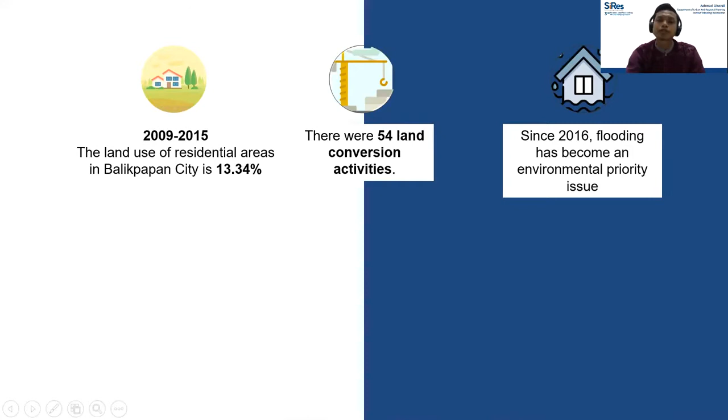First, introduction. In the period 2009 until 2015, the land use of residential area in Balikpapan city is about 13%. There were 54 land conversion activities, and since 2016, flooding has become an environmental priority issue in Balikpapan. The Klandasan Kecil watershed is one of the fastest growing areas in Balikpapan city. So this is the main issue.

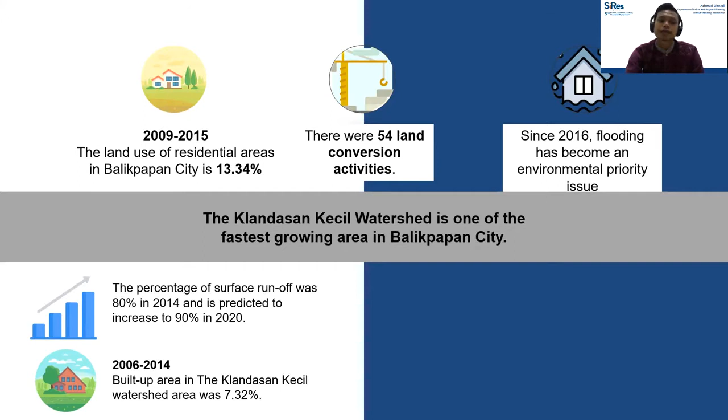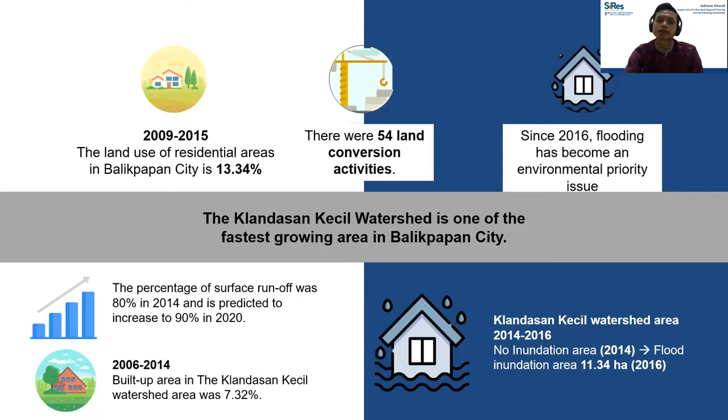So the rainwater runoff that occurs in high density built-up area is the issue, and recent research on water management in urban areas has found a new concept to heal this condition called water sensitive city. So, as a first step to implement the concept, it is necessary to calculate the potential runoff in the Klandasan Kecil watershed, Balikpapan.

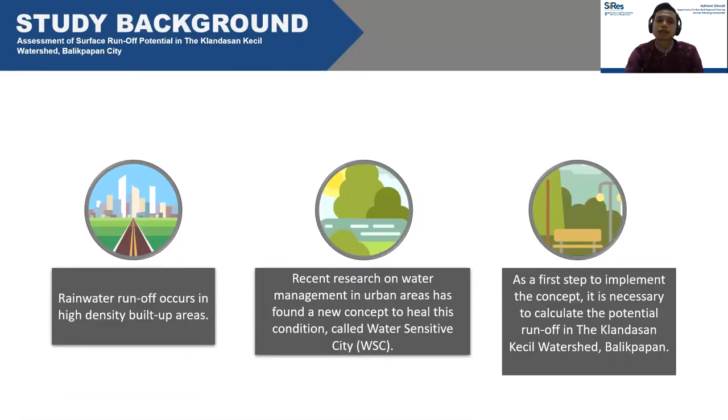I begin with a literature study on the variables in the runoff assessment in the Klandasan Kecil watershed area to determine the surface runoff, the volume of surface runoff and hydrological discharge. We found that this variable is the main variable to calculate the volume of surface runoff to calculate the potential flood discharge.

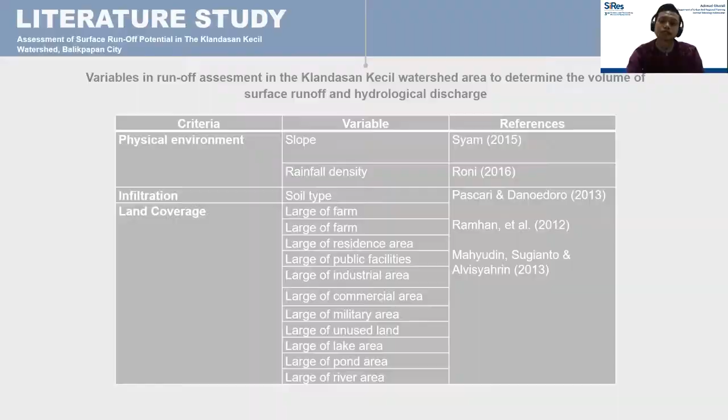And then the research methodology. First, data and scope of the study. The region used in the research area was the Klandasan Kecil watershed region, which is a rainwater catchment area. Primary data collection was obtained by means of a field survey regarding the condition and dimension of the drainage channel using a water pass device.

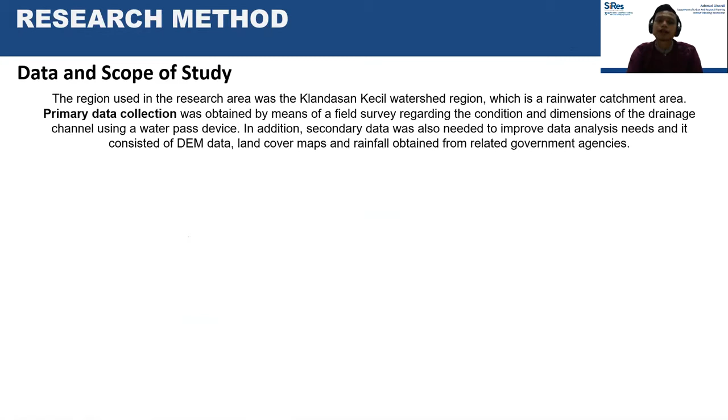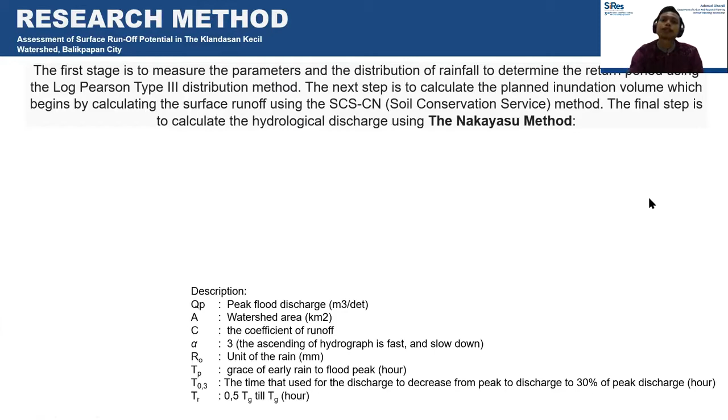And then the first stage, to measure the parameter and distribution of rainfall, determine the return period using the log Pearson type 3 distribution method. The next step is to calculate the planned inundation volume, which begins by calculating the surface runoff using the SCS-CN or soil conservation service method. And then the final step is to calculate the hydrological discharge using the Nakayasu method. Here, the formula to calculate it.

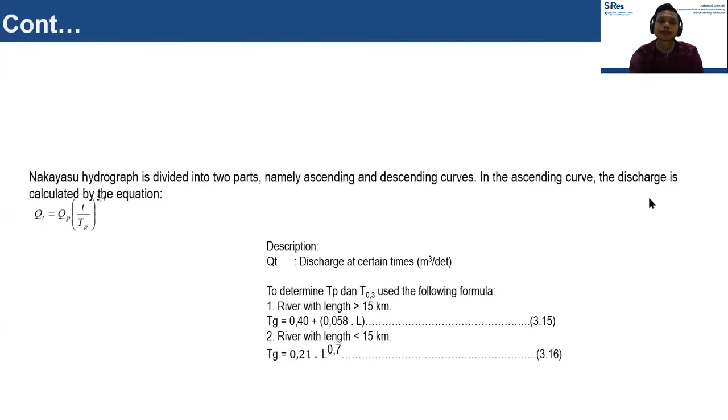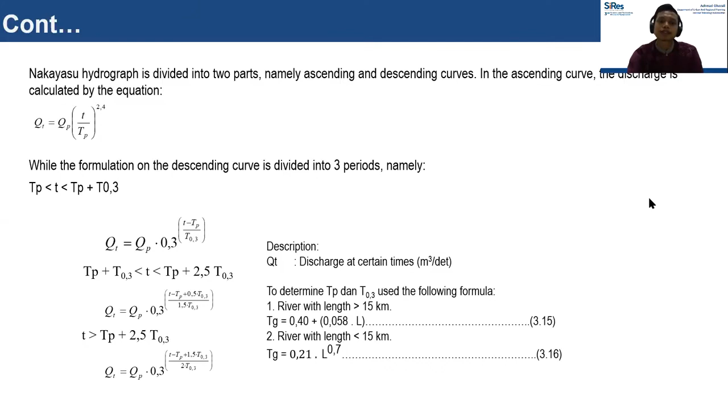And then the Nakayasu hydrograph is divided into two parts, namely the ascending and descending curve. In the ascending curve, the discharge is calculated by this equation, while the formulation on the descending curve is divided into three periods, namely the first period, second period, and the last period.

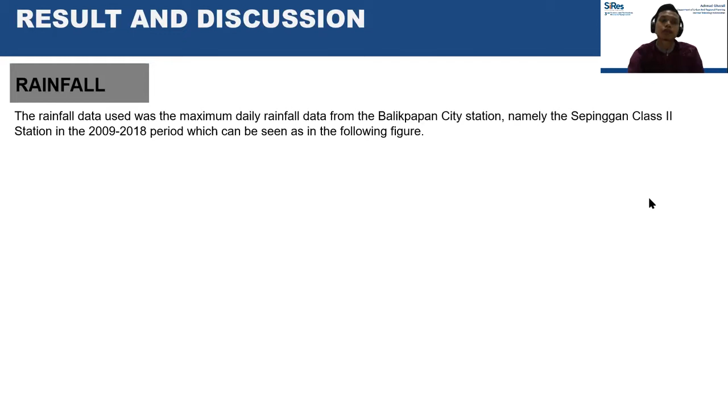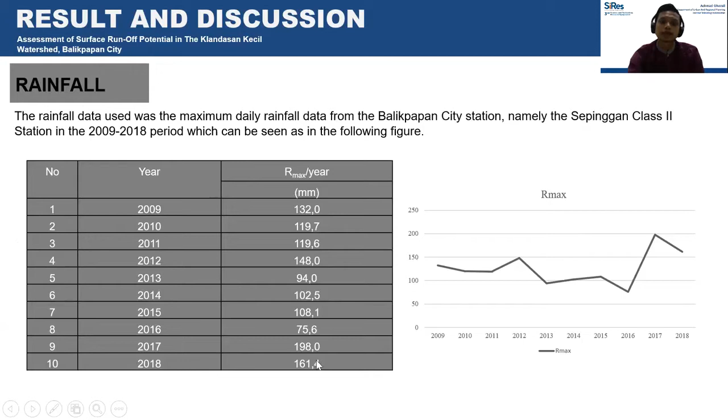And the first analysis result, analysis of the amount of surface runoff: we can see that the planned return period rainfall of 174.2 millimeter was used in accordance with the trend of the existing rainfall data. After obtaining the planned rainfall figure, the calculation of the hydrological discharge in the study area is carried out in two stages. First, calculating the flow coefficient of the Klandasan Kecil watershed based on the land cover, and calculating the design flood hydrograph using the Nakayasu method.

In this table, we calculate the flow coefficient for each land cover, and the residence. We can calculate that the residence area is about 522, and then the coefficient C is 0.7, and then the flow coefficient around this.

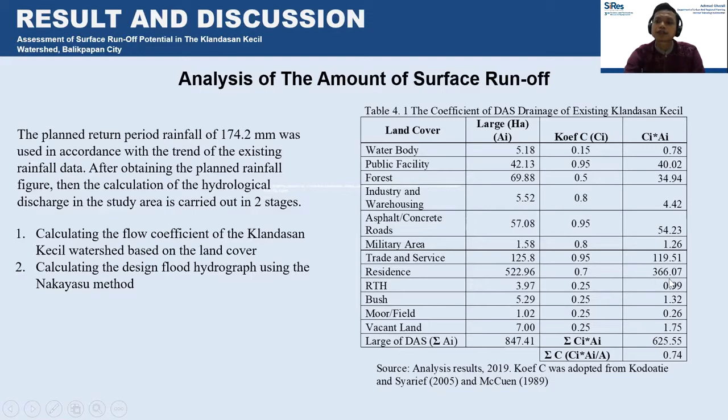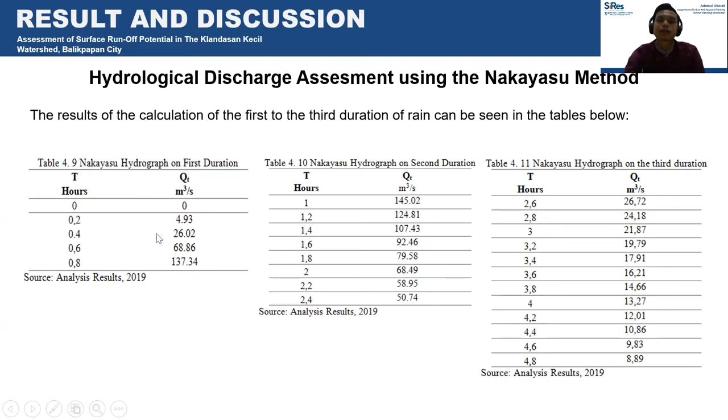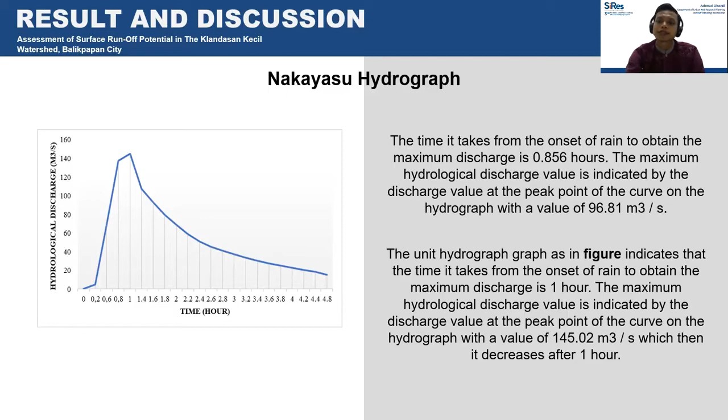The unit hydrograph as in the figure indicates that the time it takes from the onset of rain to obtain the maximum discharge is 1 hour. The maximum hydrological discharge value is indicated by the discharge value at the peak point of the curve on the hydrograph with a value of 145 meter cubic per second, which then decreases after 1 hour.

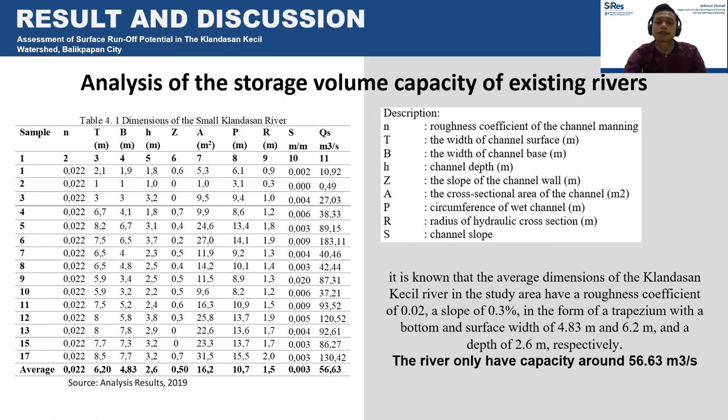And the second, the analysis of the storage volume capacity of the existing rivers. We use samples of the dimension of the channel, the rivers I mean, about 15 samples to calculate the dimension, and then we can calculate that the river only has a capacity of around 56 meter cubic per second.

So the gap of the rainfall discharge and volume capacity of the river discharge, we can calculate that the delta discharge is about 88 meter cubic per second. It means that the existing channel has not been able to accommodate all existing hydrological discharge, or there has been an overflow or flooding due to the inability of all runoff discharge to be flowed into the main river in the study area. And from the delta, we can calculate how much water is in the study area.

We can use this formula to calculate. First, we can calculate the rainfall duration each time rainfall occurs. We can identify that the effective rainfall duration is about 1.7 hours. By considering the difference in runoff discharge that cannot be discharged by the existing river, it is found that the volume of rainwater that has the potential to flood in the current study area is about 550 meter cubic of water. So we can imagine how much water will inundate the area.

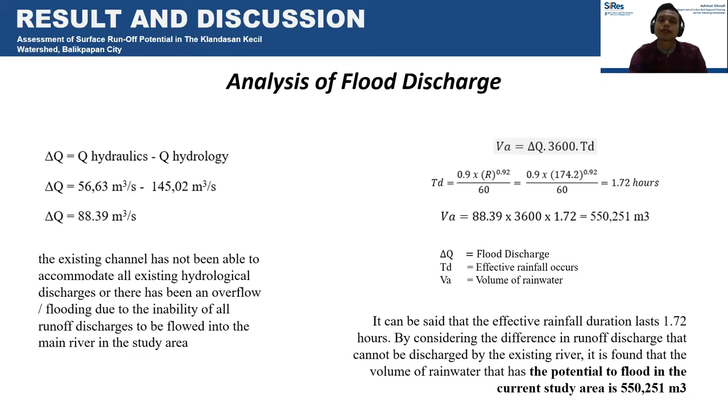And then the conclusion. So first, the planned rainfall with a return period of 10 years in the study area is about 174 millimeter, a high enough rainfall. The peak hydrological discharge that occurs in the study area reached 145 meter cubic per second with a hydrograph peak time at 1 hour of rain. In addition, the effective rain duration that could potentially occur in the study area was 1.72 hours. And the second, the length of the Klandasan Kecil river was 3.8 kilometers with an average width and depth of 6.4 and 2.6.

With this dimension, the hydrological discharge that can be flowed by this river was only 56 meter cubic per second. So the third result, the comparison of the hydraulic discharge and hydrological discharge in the study area indicates that there was a potential surface runoff that cannot be handled by the existing river of about 88 meter cubic per second, and it had the potential to become inundation in the study area. By considering the duration of effective rainfall and flood discharge, it can be estimated that the volume of runoff that cannot be accommodated by the river was 550,251 meter cubic.